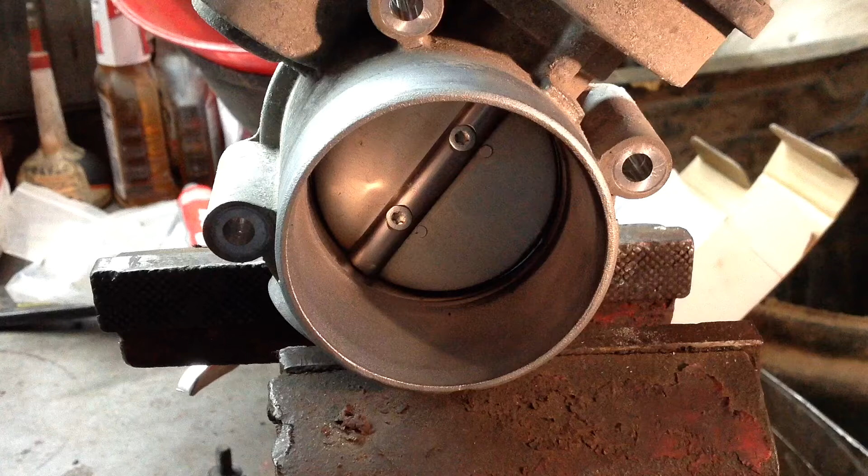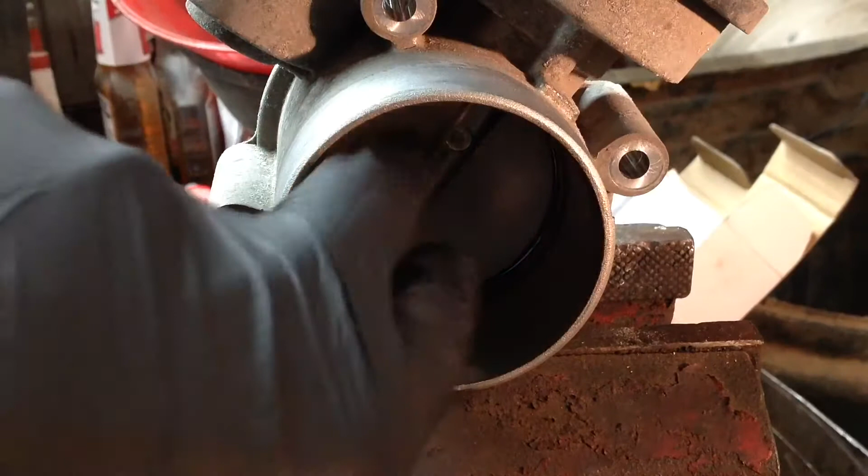Okay, this is a throttle body. Normally this is mounted to the intake manifold on your engine, and the air enters the engine through this throttle. The butterfly here, the throttle plate, the further it's open, the more air can enter, and that's the closed position.

This throttle body is electronic. What I'll show you today is a throttle body on a cable operated, which is no electronics, just controlled by a throttle cable.

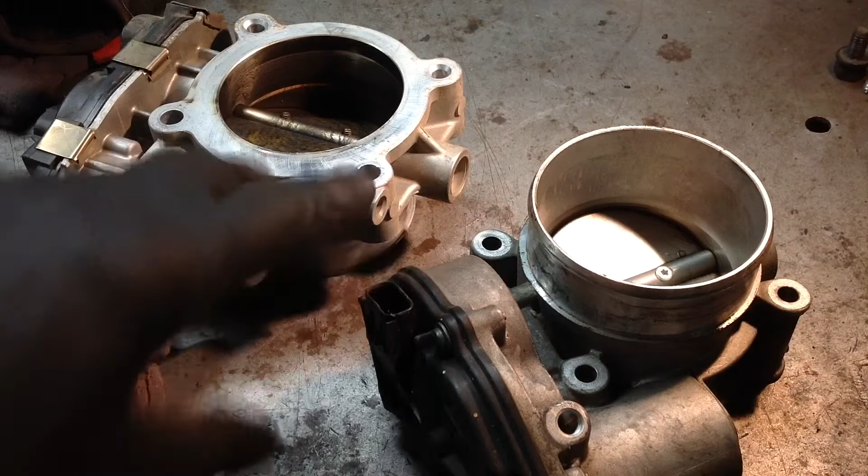I have two more of these electronic throttle bodies here on the workbench because I replace a lot of electronic throttle bodies. There's a lot more parts to them. They're more complicated. There's more to go wrong, and they fail pretty often. The cable operated throttle bodies, you never have any problem with them other than the cable itself.

But one thing that all the throttle bodies have in common is a lot of carbon buildup over time, over mileage. You get a lot of carbon buildup on the back side of this plate. You can see the worst of it. This is the front, this is the back side. Like I said, it's common on all of them.

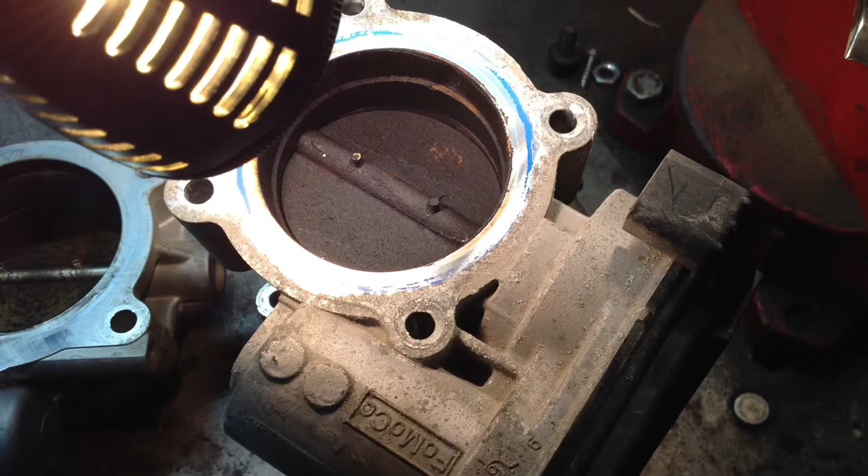I've blocked this one open so you can see the throttle plate. When you're cleaning these things, because you do need to clean that carbon out occasionally, the important part to clean, to be very sure it is clean, is this edge. Both sides, but the edge is the most important.

Some people clean the plate off on the sides, because it's easy to reach, it's easy to see. But that's not actually the most important part to clean. It's this edge, the side of it, the very edge.

The reason being, when this throttle plate is closed, like that, the only air that's going to come in on electronic is the air that bypasses the throttle plate when it's closed. If there's carbon there, it blocks part of the air, and it changes your idle speed, your minimum air that's allowed to bypass.

And on a cable operated, it works the same way, but it has an idle motor that will allow some of the air to bypass the edge there. But it has an effect on the idle speed and what the idle motor has to do on a throttle cable operated system. We'll take a look at one.

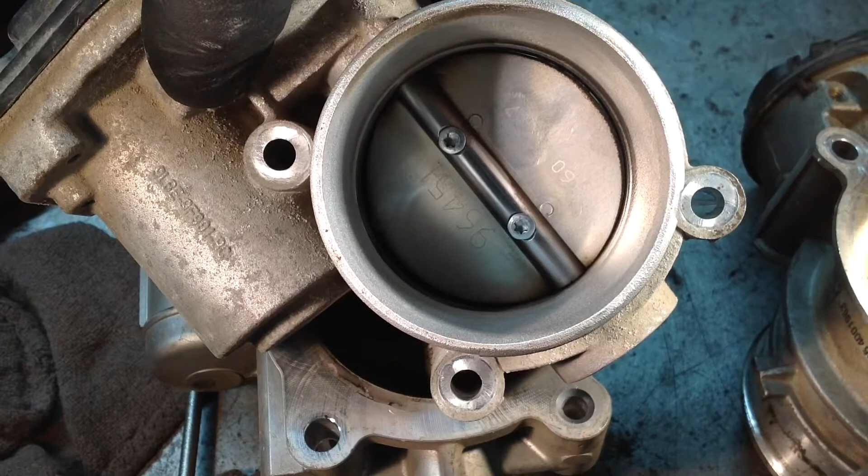We're still on the front side of this electronic control. I wanted to show you one more thing. See, there's no hole inside the throttle bore other than what the throttle plate's covering. So what bypasses the throttle plate is the only air that's entering the engine.

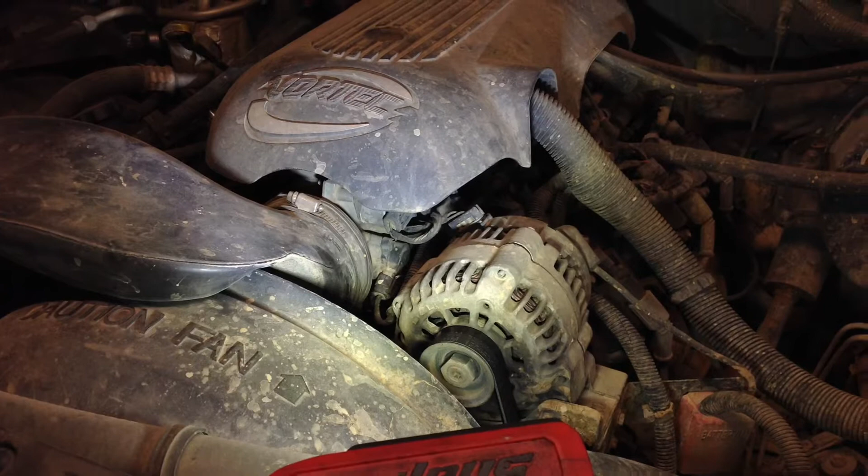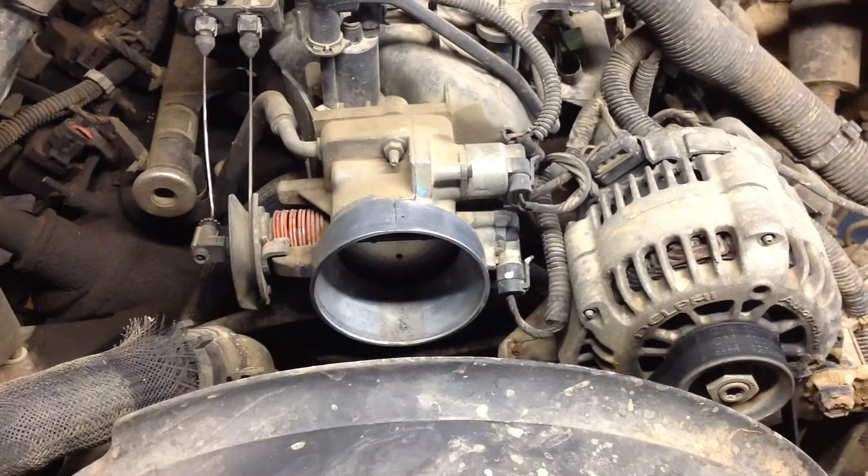Okay, I've removed the engine cover and the air intake hose, and this is the throttle body. There's the throttle cable. That's the cruise control cable. This is the throttle position sensor. This is the idle air control, idle motor.

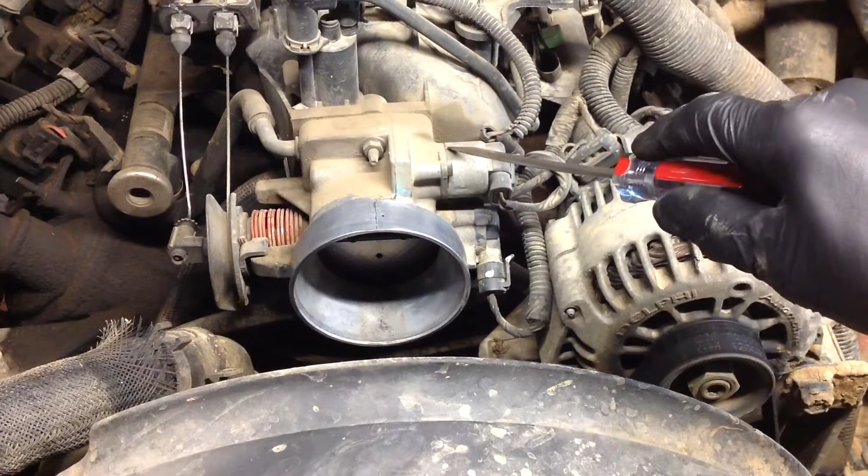The reason it's called idle air control is because it controls how much air will bypass the throttle plate. Let me show you what I mean.

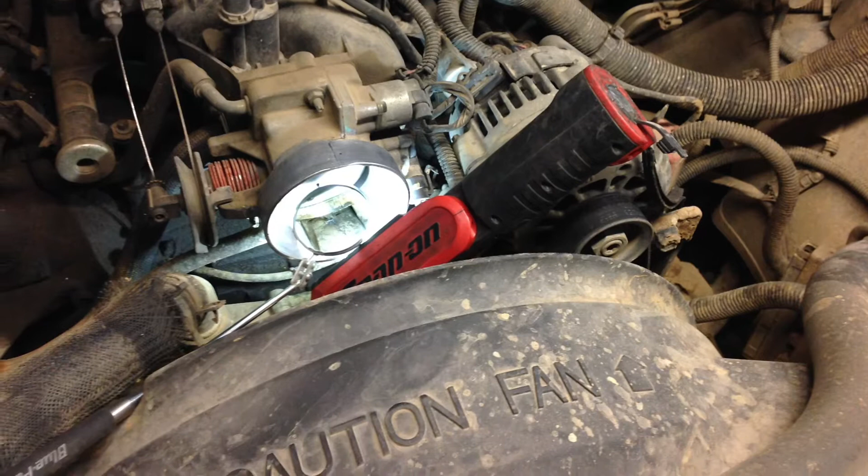Okay, I've placed a mirror in there where you can see the port at the top of the throttle body. So the only way I could get a good shot of it is with the mirror. Sorry for that. But you can see the port there. That's where the air is drawn in by the idle motor.

And the idle motor has a pintle that closes and opens, and the further the pintle opens, the more air enters through that port, and that air bypasses the throttle plate.

The throttle cable, when it's released, the throttle plate's closed. It's spring loaded, so anytime you're not accelerating and you're not touching the accelerator pedal, then the throttle is closed. So the way the idle is controlled is by the amount of air allowed to enter through that port.

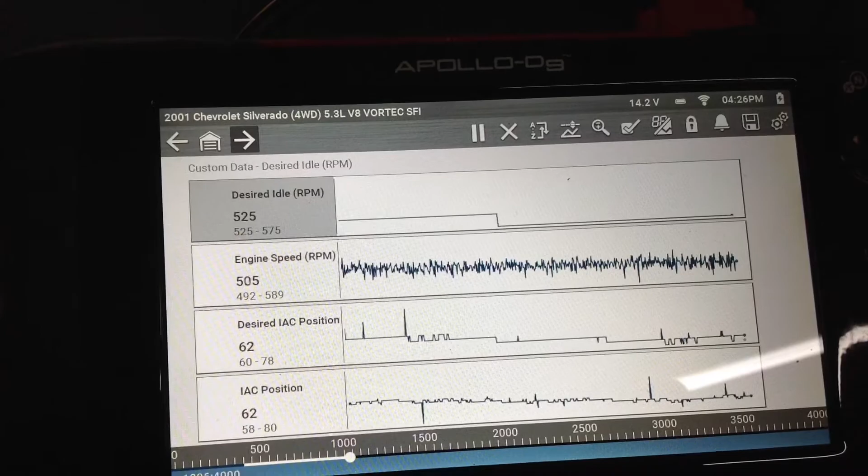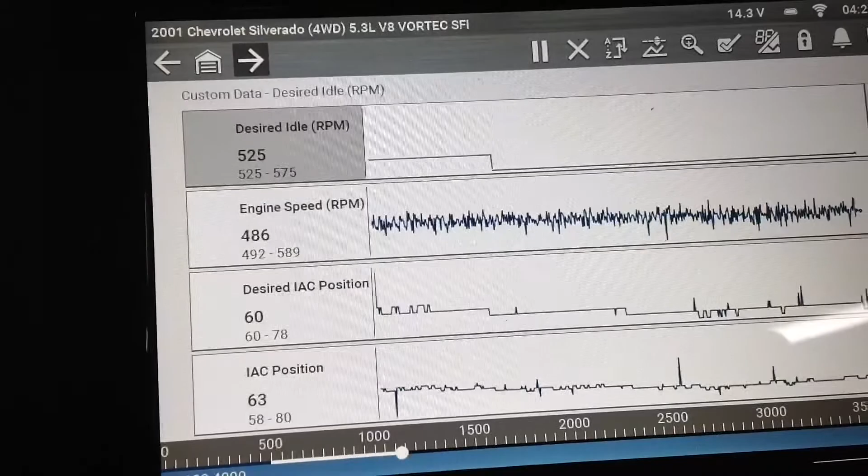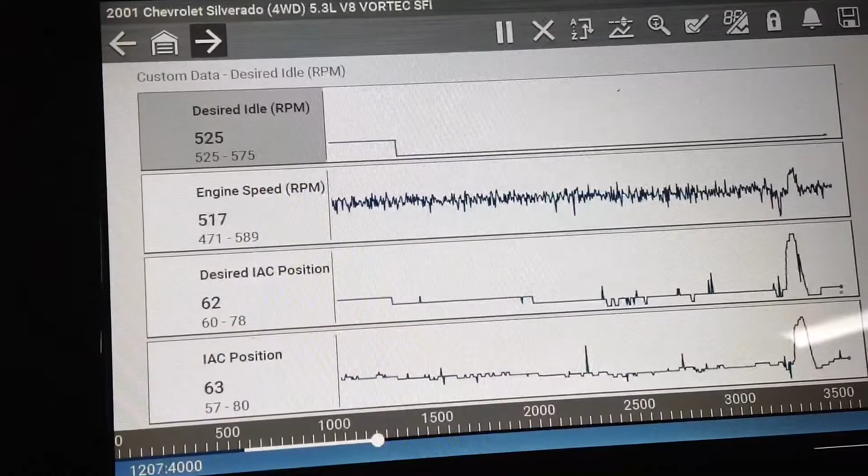Okay, now I'm going to drop it in gear. And back to park. Okay, I think we've done a pretty good job cleaning it up. Remember, the important parts are where the throttle plate is going to be against the bore and on the edges of the throttle plate.

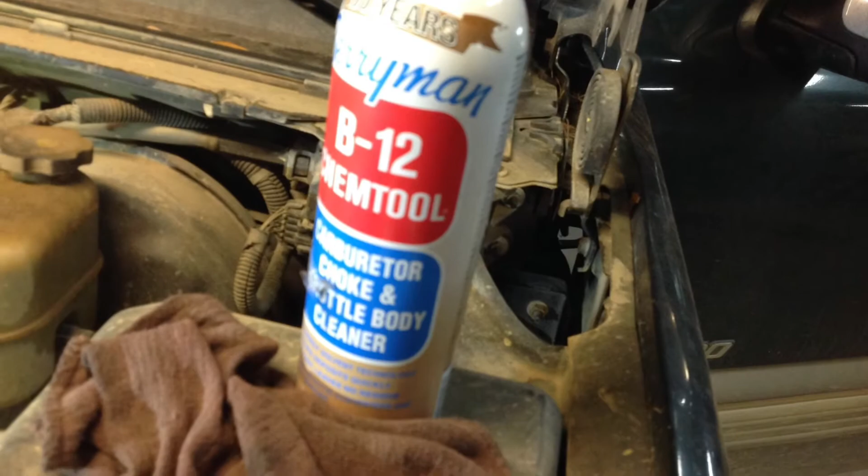Okay, we've got everything back together. The idle air counts, you can see the difference. The higher the number there, the further the pintle is opening to allow it to idle. Now it's not having to work nearly as hard.

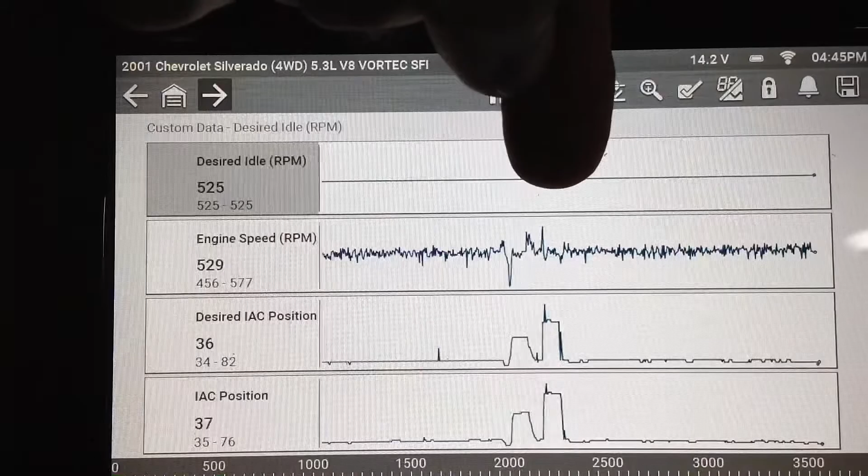These points here we're doing an idle relearn, so I let it idle a while and then I drop it in gear again and watch it speed up, and then cycle the air conditioner. That's the two humps there. Then we're back down because it's still updating. It's still learning the new idle position.

So as it's driven more, now that it's cleaned, and as it's driven under normal conditions, stops, goes, defrost on, air conditioner on, steering, everything, eventually it should be 26 or below. Should be your idle air counts. So, good job, right?